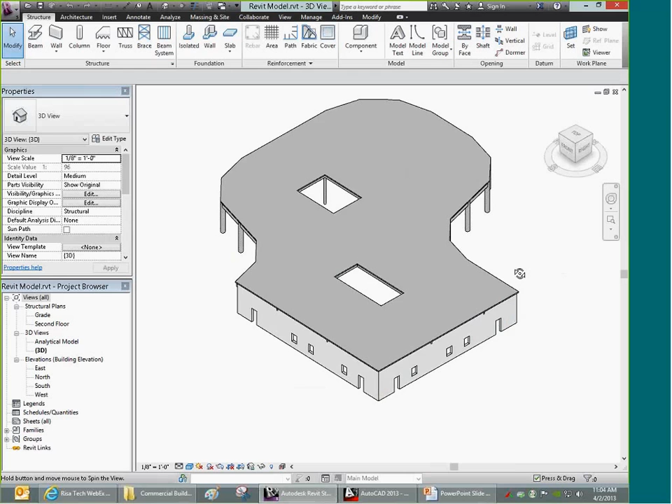So to start with, what we're going to actually take a look at here is an existing Revit model that I've created, and we're going to bring that Revit model over into RISA. Let's look first off at this Revit model, which is just a single floor of perhaps an odd-shaped commercial building, where we have some bearing walls, some columns, and this whole system here that you can see is made out of concrete.

So in this case, I've created a series of concrete columns, concrete walls, and beams. And if I click on one of these columns, we can actually go in here and take a look at its analytical properties. You can see that on the Revit end, I can set whether or not I have fixed or pinned end releases. I can also set whether this column is part of the lateral force resisting system or just holding gravity loads.

Similarly, on the walls here, I can come in and set what this wall is made out of. In this case, this is just a generic 12-inch wall, concrete beams. So I just have some generic sizes set for everything in the Revit model here, and we could presume that maybe you already had your Revit structure model built, or that you built one based off of an architect's model. But in this case, for the first floor of the building, we're going to take a look at how we would do commercial building design starting from Revit.

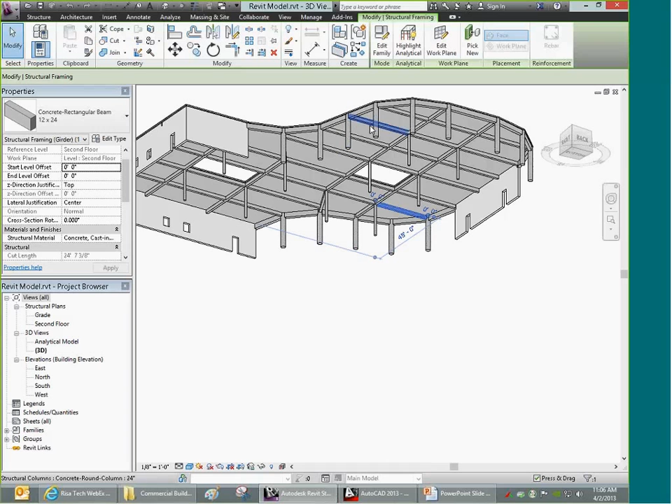So in my Revit model, once I have everything set, I want to make sure that I have the RISA Revit link installed.

Now, that's a free download from our website, so you can go on there and download it. And what that does is it adds this extra button into Revit, which is Export to RISA. It also adds an Import from RISA button.

So if I come on here and say Export to RISA, it's going to ask me whether we're going to export to RISA Floor or RISA 3D. Now, for building design, RISA Floor is definitely more powerful, so that's what we're going to want to go with here. I'm just going to leave all the rest of the settings basically the same, and export out to this folder. So I picked a path for that.

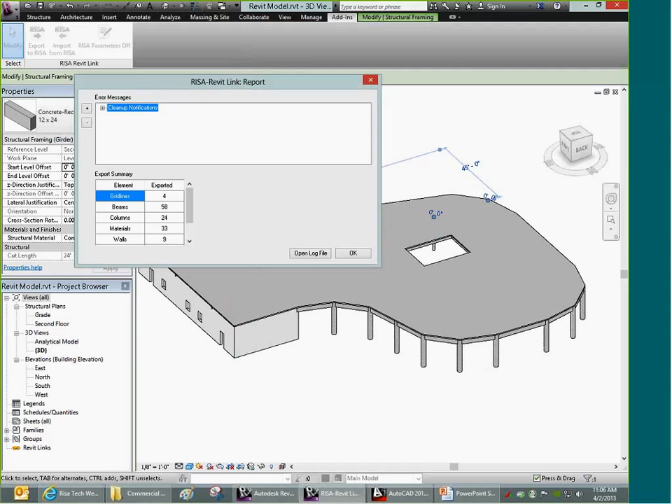And when I hit OK, Revit, using the RISA Revit link, is going to take all of this information and send it out to RISA. Now, before it sends it over, it's going to give me a little report, and it's going to say, hey, a little bit of model cleanup had to be done in order to get this model into RISA. That's pretty typical—sometimes some joints won't quite align, so it'll do that cleanup. Otherwise, we get a nice little summary here that shows everything that was sent over into RISA Floor.

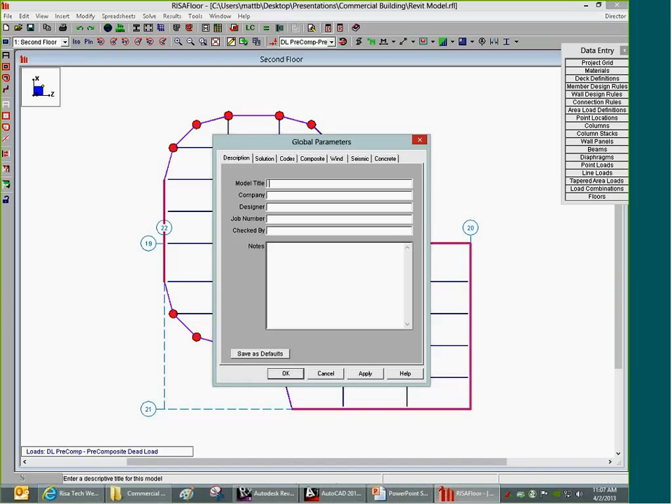So now RISA Floor launches, and we're in version 7 here. The first thing that pops up is the global parameters. I'm going to hit OK and exit out of there so we can take a closer look at this model that I've got going on here.

So let's come up and take a look at a full model view of what we have. You can see that it pretty much matches what came out of Revit. Now the slab that was on here, if I set that to be transparent, you can see that gets brought over as a slab edge—that's that blue line in the RISA model. And here all the walls and beams and columns and everything else has come over.

This is how we're going to handle just the first floor of this building, as though we brought it in from Revit. Certainly Revit has a lot of information, but it doesn't have all of the information necessary to analyze and design a building. So there's a few things that we need to go in and tweak.

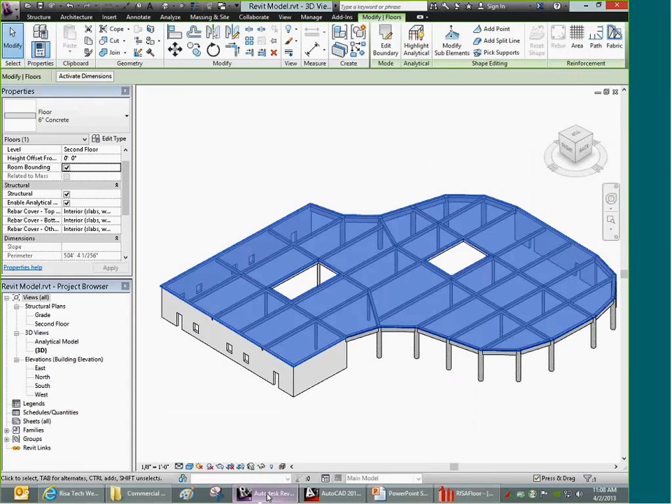For one thing, if I come in here and take a look, we can see that we have a deck that got brought over from Revit, and that would be this sort of concrete slab that runs around here. This was brought in with the definition of 6-inch concrete. So I can come in here and modify what exactly that 6-inch concrete deck means. I can come into my deck definition spreadsheet within RISA Floor and tell the program, yeah, 6 inches is good, but I'd like to use 4,000 normal weight concrete. This is some information that the Revit model may not have had stored in it.

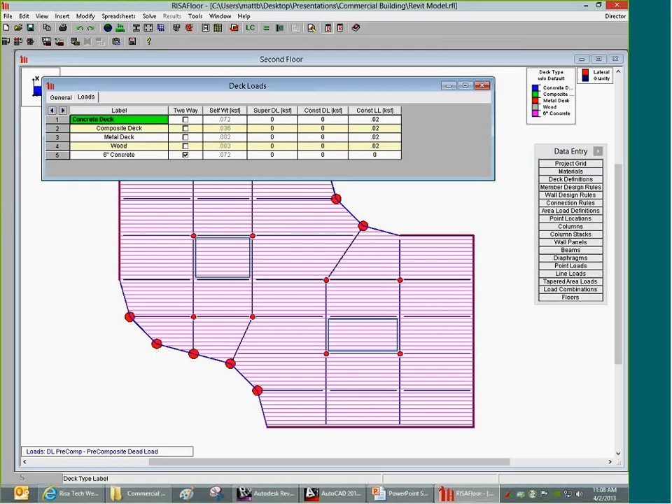Now, I'd also like to make sure under the Loads tab here that this is set up to do a two-way load attribution, and indeed it is—that's what was set up in the Revit model. So we're good to go on that one.

The same thing goes for the columns as well. There was a material set up in Revit called Revit Cast-in-Place Concrete, but that really doesn't have all the information that we need to get a column design. So I'm going to come in here and clarify to the program that I want all of those columns to be using 4,000 normal weight concrete as well.

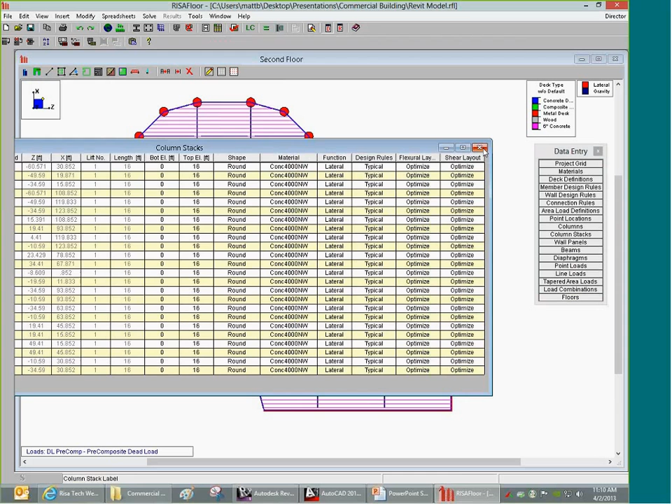So I'll apply that, and sure enough, now all the columns are set up to use that correct concrete. A lot of times when you go back and forth between RISA and Revit, it's important to come in and modify some of these materials to make sure all the properties are present, because Revit is set up primarily to do BIM and drawings, so it doesn't always have everything you need to get a full analysis done.

The same thing goes for the beams here. I'm also setting all those beams up to use the 4,000 normal weight concrete. So at this point I have this floor set up the way I need it, and there's really nothing else I need to do. You can see it's very quick and easy if you have a Revit model to get your building design set up and going.

But I understand not everybody out there is using Revit, so let's take a look at a similar example where we use AutoCAD instead. In this case, I have an AutoCAD drawing here.

In this AutoCAD drawing, I've modeled all of my beams as line elements. I've modeled all of my columns as blocks, where the center point is where the center of the column is. And my walls I've modeled as a polyline, with the thickness of that polyline set to be what the wall is. I've put the beams on a beam layer, the walls on a wall layer, and the columns on a columns layer.

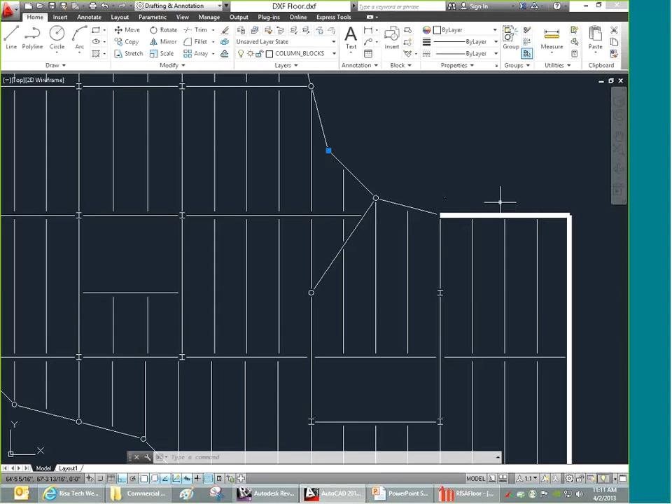Now, if you're going to start out in AutoCAD, you probably have a much more complex drawing that the architect gave you, so you may need to shut off some of the layers in there, or tweak certain things. If your wall is drawn as lines representing the inside and outside faces of the wall, you may need to go in and draw a polyline where the center line of that wall is, because that's the only way RISA is going to be able to read that in. But once you get everything set up, it's fairly easy to read into RISA.

Also note that in this case, I have all my beams set back about 12 inches from the center line of the beams that they intersect, or of the columns. That's going to be important to notify RISA when we import, that we have that setback. Otherwise, it will just terminate the beam right here, and that beam will be floating in space over near the girder.

So coming back into RISA Floor, I'm going to go up to the File menu, and you'll note that we have under Import this DXF file option. I've saved my AutoCAD drawing already as a DXF file. So now when I go to Import DXF file, I can point right to that file.

When I open it, it'll ask me a few questions. There's the scale factor and the units, which I can leave set as 1 in inches, since I set my drawing up to be in inches, the default for architectural drawings in AutoCAD. I'll tell it my floor elevation is at 30 feet. The beam standoff is the distance I have the beam ends standing off from members they intersect, and I've got that set to 12 inches. There's a tolerance, so you don't have to have everything exactly at 12 inches — that's just the maximum distance.

Now when I come in here for beams, it's going to ask me which layer of that AutoCAD DXF the beams are on — those are on the beam layer. I have my columns on the column layer, my walls on the wall layer. If I had grid lines for this project, I could also bring those in, but in this case I don't have any, so I'll tell it not to import anything for grid lines. This checkbox, 'ignore framing support for beam layer,' I get questions about occasionally — if this box is checked, the program will bring these beam ends in literally exactly where they are.

So all these beams would be floating, and you'd have this big disconnect, and the whole model would be unstable. But if I uncheck that, the program will come in and make sure each beam is supported at both ends by something, considering that end offset distance. That's the way we want to do it for an AutoCAD drawing that's drawn like this.

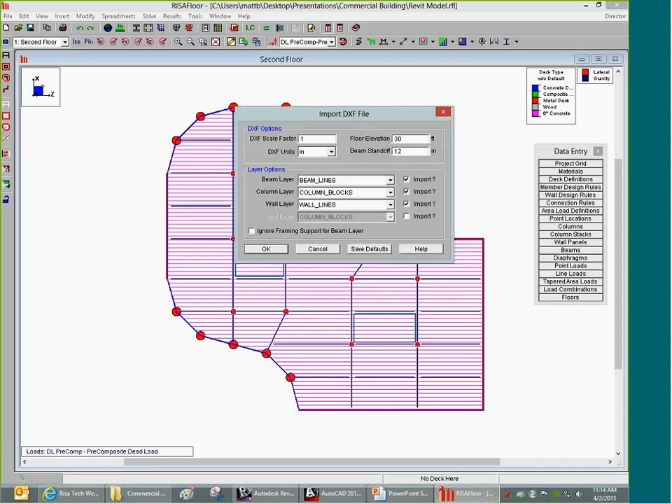If I had drawn all the beams so that they snapped all the way to the intersection points, then I would want to tell the program to ignore how those beams are supported and just use the literal lines that are in the drawing.

So with this all set up, I'll hit OK. And what happens now is we've created an additional floor in the model that is based off of that AutoCAD drawing. You'll note that these two lined up in this case.

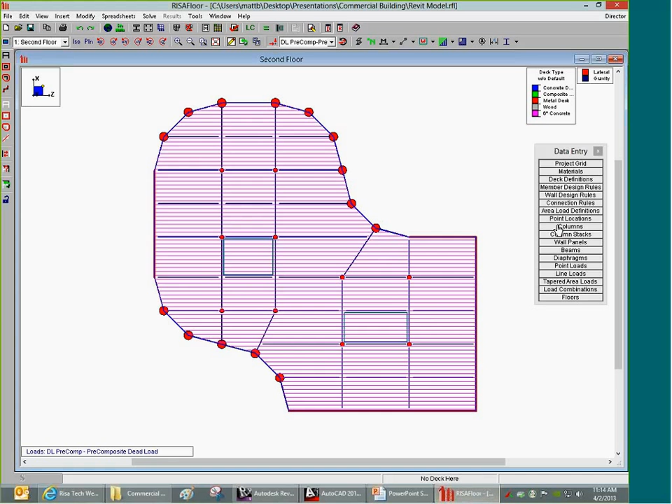That's because in order to set this presentation up, it's not realistic that you're going to be bringing in both AutoCAD and Revit. I made sure that the X, Y, and Z coordinates between the Revit model and the AutoCAD model I created were all aligned.

So at this point, when we bring it in from AutoCAD, there is certain information that can be gleaned from the AutoCAD model, but not nearly as much as we can get out of the Revit model. The AutoCAD model, for example, didn't really know what material any of these members were made of. It didn't know the thickness of the walls. It didn't know whether this is a gravity or a lateral member. It doesn't know a lot of that information.

So when we import from AutoCAD, there's a bit more work that we have to do to come in here and set everything up. But we'll go through that right now so you can get an idea of what's involved in modifying a model once you bring it in from AutoCAD.

The first thing I'm going to do is come in and give this a proper name. We're going to call this the third floor, under the floors spreadsheet in RISA Floor. I'll tell it to use the office area load. Now we're going to take this as a steel floor, and I'll put this in as a composite deck so that we can get a composite steel design for this.

We're going to come in and set up the splices. I'll say the splice on these columns will be 14 feet below the floor level, so the steel columns will be spliced right at the top of the concrete columns. I'll set up a shear splice, which implies that the base plate, where the steel column sits on top of the concrete columns below, is only set up to transfer shear and not moment. That'll be fine for this design.

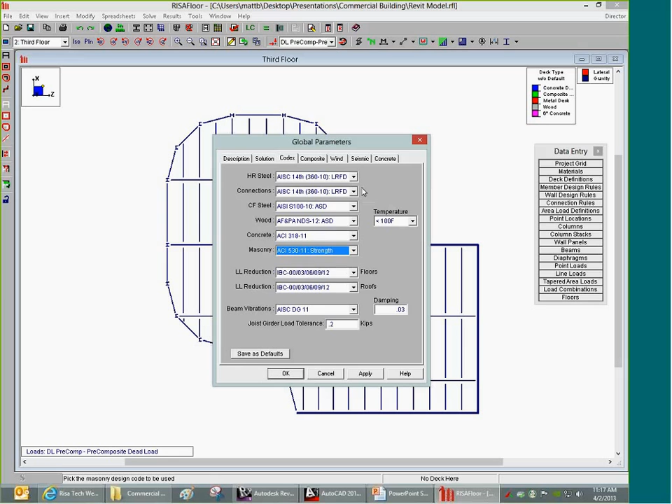I'm going to come in here. We can review a couple settings for composite. In this case, I'm going to adjust my beam deck parallel angle.

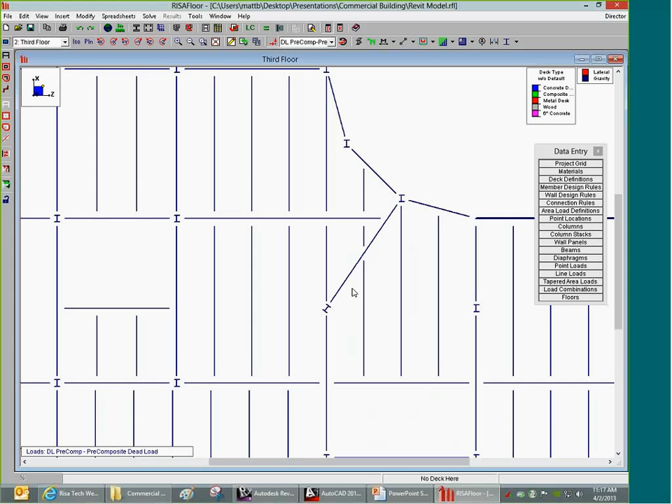This is one of the more advanced settings, but when we have members that aren't exactly orthogonal with each other, sometimes you need to tweak a few of these settings to get a full composite design out of it. In this case, I had to tweak that setting so it can design this skewed beam, because the ribs are going to be running east to west in this building on my rib metal deck, but the beam isn't really running perpendicular or parallel to that. So it's just a tolerance setting in this case.

Now let's go in and modify the walls in this one. Currently you can see that these wall panels were brought in as what's called a general wall, and with the general wall we can't get any sort of design, but I do want to get a design on these walls. So I'm going to tell the program to make all these masonry walls. We're going to tell these are lateral walls, which means they're going to act not only as bearing walls, but also as shear walls, and I'll set that up to apply to all of these walls.

So now at this point, we have masonry walls sitting on top of concrete walls. Is it realistic? Not necessarily, but the whole point behind this webinar is to show you all the different options for building design. So this may not be the most realistic building you'll see, but I want to make sure that we cover all the different bases behind the commercial building design within RISA.

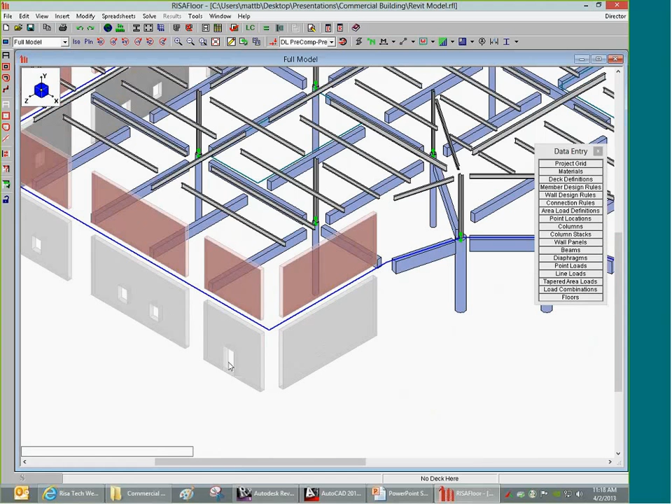So now, when we came over from Revit, if I take a look at the full model view, you can see that all the openings that existed in the Revit model came over into RISA. However, when bringing something in from AutoCAD, this is just a 2D AutoCAD drawing, and that's how we import from AutoCAD into RISA 3D, into RISA Floor, just 2D for the floor levels. So we don't have any information about what those wall openings may be.

What we can do, though, is enter that information directly within RISA Floor. All I need to do is double-click on a wall here, and this is going to pull up an elevation of this wall. I can come in down at the bottom and give it dimensions to give me snap points for windows. So now I can draw windows in using the Draw Openings tool. You can see that on a masonry wall, whenever I draw an opening, it automatically places a lintel above that opening. I'm going to go around the perimeter of this building and put in some snap points so I can draw in windows on all these walls.

Certainly we want to be realistic and capture these effects, because the windows in the walls are not only going to affect the way the reinforcement is laid out, but they're also going to affect the lateral stiffness of the wall. In this case, we're going to have a rigid diaphragm on this floor, being a concrete composite deck, so I want to make sure these walls all have the correct rigidity.

Why is that? If we take a look at the layout of the building I've got here, you can see it's sort of an unusual layout. So we're going to get some torsional effects, and by torsional I mean torsion, a twisting of the entire building, due to the fact that the center of rigidity of this building doesn't exist at the same location as the center of mass. So the loading for both wind and seismic is going to be offset.

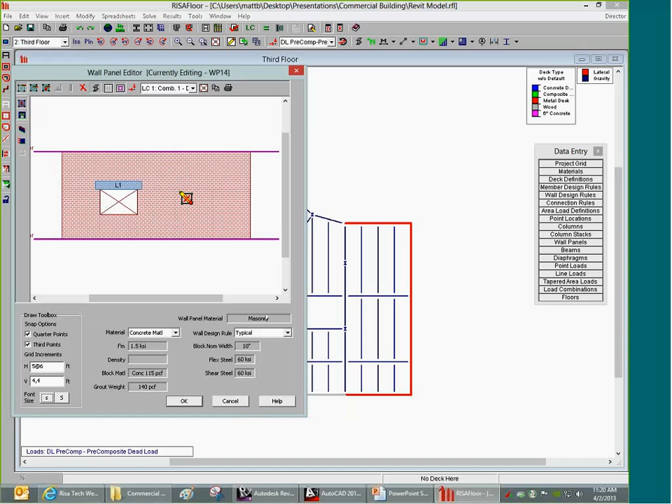The solver within RISA 3D is going to be able to pick up those effects, but in order to get the proper load distribution using finite element analysis, we need to make sure we've got the proper rigidity in here, hence the importance of putting in all of these windows and openings. Now at this point, I've put openings all around the perimeter of the building, and we can see that reflected there. That'll take care of that.

The next thing we want to take a look at on this floor are all of the columns. We can see that the program brought in all of the columns from AutoCAD as just plain gravity-only wide flange columns. I'm going to come in and tell the program that I actually want all of these columns to be acting as part of the lateral force resisting system.

And we'll see why once we get up to the roof of this building. For now, another thing I want to do is set this bay up right here as a moment frame. In order to do that and have it be effective, I need to have those columns rotated so that they're facing their strong axis to that beam.

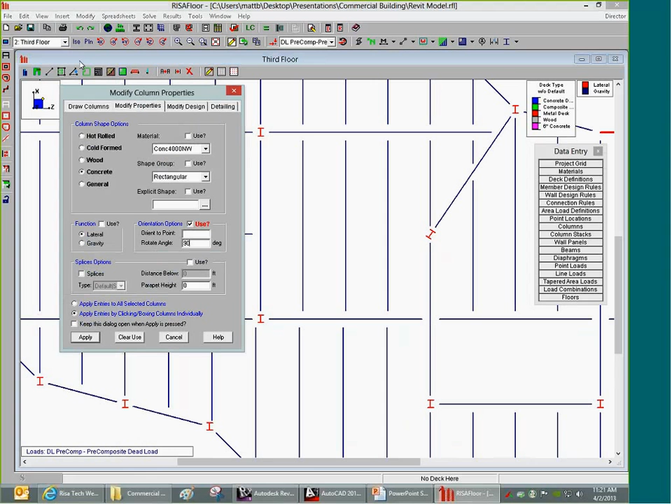So we can just come in here, using the modify columns, and rotate these columns by 90 degrees so that now they face each other.

At this point, it's important to set up the complete lateral force resisting system for this floor. I've mentioned already how we have the masonry shear walls over here, but let's say for the sake of complexity, so you can see all your options in the program, let's go with a dual system. We're going to have a dual system of both masonry shear walls and steel brace frames and steel moment frames. Once again, probably not a very realistic layout, but the idea is to get a look at how everything works in here.

So I'm going to start off by setting up these beams as lateral beams, and we're going to say that'll be a braced frame, that'll be a braced frame, this will be a moment frame, and this will be a moment frame.

So now these 4 frames are identified in such a way that when we go into RISA 3D later to get the lateral design of this building, these beams will be brought over, and the program understands that these are important for the stiffness of the building, for our stiffness solution.

I'll come back in here and tell the program that I want my 2 moment frame beams to have fixed ends as opposed to pinned ends, which is the default. I'm also going to tell it that those moment frame beams are non-composite, because of course if they're fixed end, they're going to have some negative bending along their length, so we won't be able to take advantage of that composite action.

With that being set, let's also take a look at the materials in this case. So when we brought everything over from RISA, or from AutoCAD, what we see is everything came over as just A36. Well, in this case, I want to use a stronger steel, so I can come in.

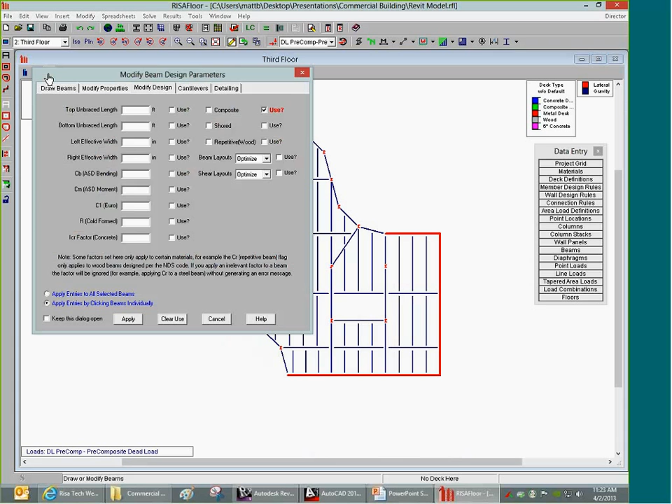So I just click OK on that, and I'll do the same thing for the beams as well. We can come in and set all these beams up to be using A992. Apply to all selected, and now all of the beams in this model are all A992 wide flanges.

And most of them are set up to be pin-pin strong axis orientation. So at least the program got that part out of the way for us.

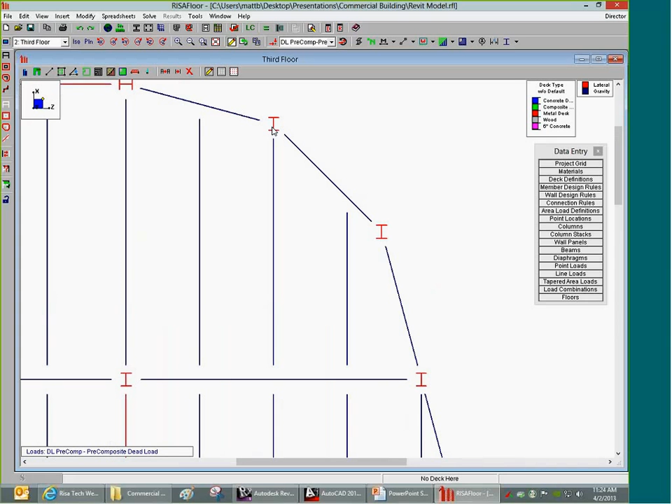Now, for the exterior of the building, what we're seeing is these wide flange columns came in by default, and I don't know about you, but I wouldn't want to have to bother doing a connection of this beam into this wide flange column with it oriented that way.

What I'm going to do is put a different column type in here to make it easier to get our connections. In this case, I'm going to come in and pick out an HSS pipe. So that's going to be an HSS round shape, and I'll put the correct A500 grade 42 on there.

And what that'll do is allow us to make easier connections on the outside of the structure. Now I'll be able to come in and weld a shear tab to all 3 sides of this column and connect shear connections to all those beams accordingly.

So some of these things that you may not have to deal with immediately, such as how you're going to do your connections, are things you might want to think about earlier on when you're laying out your project, so you don't have to go back later and change your columns to be something that the fabricator or the detailer might be more concerned about.

Now at this point, we have all these members set up. I'm going to come in and add a rigid diaphragm all the way around the perimeter of this structure.

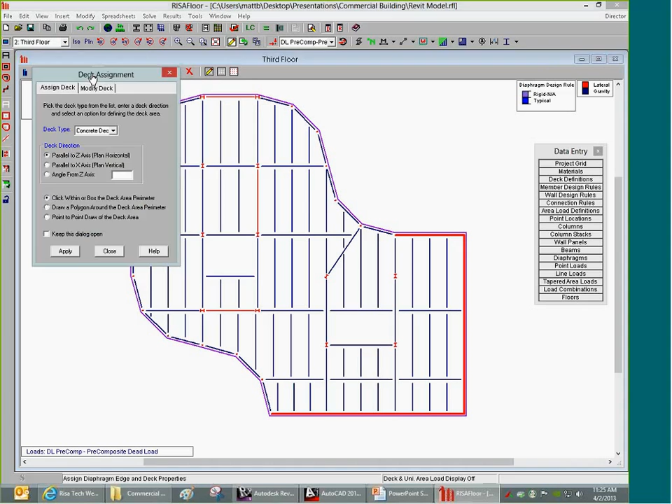And I'm going to punch a couple of holes in that diaphragm as well. You'll note that on the second floor, those were already punched through because these holes existed in the floor system within Revit. But in here, we don't really have a way to bring in diaphragms and openings from AutoCAD, so I just have to come and draw them in here.

And these openings are going to affect not only what the composite design of this beam is, since the effective flange width is cut out, but it's also going to affect our lateral distribution, because now the diaphragm has a hole in it, and so that affects where our center of mass is going to be. It can also affect centers of rigidity, depending on how I've got lateral systems arranged within the vicinity of that hole. All right, the opening is all set.

So now at this point, I've got 2 full floors done, one from Revit, one from AutoCAD. Now you'll note that the AutoCAD floor took longer to do than the Revit floor, certainly.

Let's take a look at that third option we discussed, which is creating a model from scratch. So I'll go up to Insert Floor within RISA Floor, and we're going to come in and call this one the roof in this case.

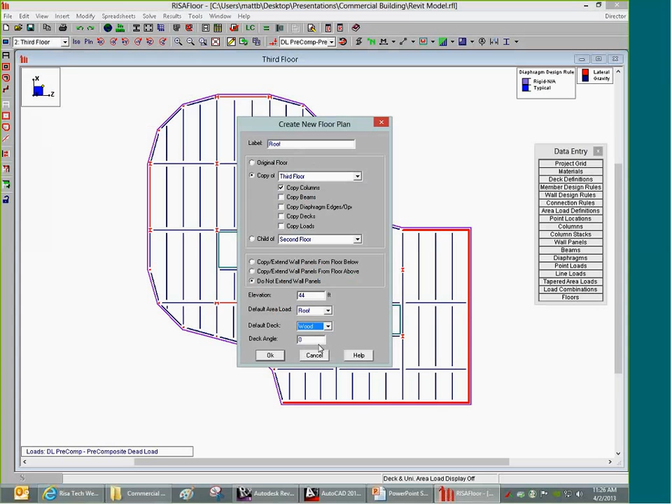And for the roof, we'll make it a copy of the third floor, but I want to do a different framing system up on the roof, so the only thing I'm going to copy up are just the columns in this case. I'll set the base elevation for the roof at 44 feet, and I'm going to give this a roof load with wood decking on there.

Now when I hit OK, all it's brought up for us on the roof are just the columns that we had from the floor below. One additional thing that we have available to us are the nodes from the floor below, which also got copied up. You may not be aware of it, but within RISA Floor, we do actually have nodes behind the scenes that are connecting everything.

This is one thing that makes RISA Floor a bit more powerful than some other similar commercial building design softwares, as you still have the ability to come into spreadsheets and move things around if you don't want to do it graphically. Certainly, graphical modeling is very fast to do in a lot of cases, but there are occasions where having the power of the spreadsheets in there can be something you really want to take advantage of.

Now, in this case, what I'm going to do is delete a couple of the columns that got brought up from the floor below. And when I do that, the program's going to ask me whether I should just be deleting the column at this floor or all the way down. In this case, I'm going to tell it only delete it at this floor.

I want to do this as a wood floor, and so I'm going to want to have some wood-bearing walls. So let's just come in to Draw New Walls. Under Draw New Walls, I can pick out my wall material. Let's say we'll do wood southern pine, and these would be lateral wood walls, so they'll be taking shear loads within my structure. And I can just draw this node to node if I like.

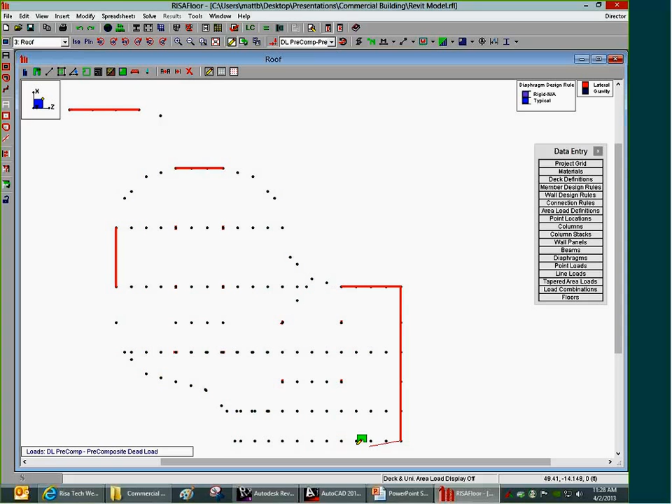So I'll come around and draw the walls in similar to how they were in the floors below. We'll drop those in, and these will also act as bearing walls for all the roof members that are going to be sitting on top of them.

Next, I'm going to put in some members. So I'll shut off the display of nodes so that I can just draw column to column. That'll be the easiest way to do that. I'm going to come in to Draw New Beams, and we're going to draw wood beams. Now, I could draw these as wood dimension lumber, but I'm going to have some rather long spans. So instead of going with dimension lumber, I'm actually going to go with the glulam in this case.

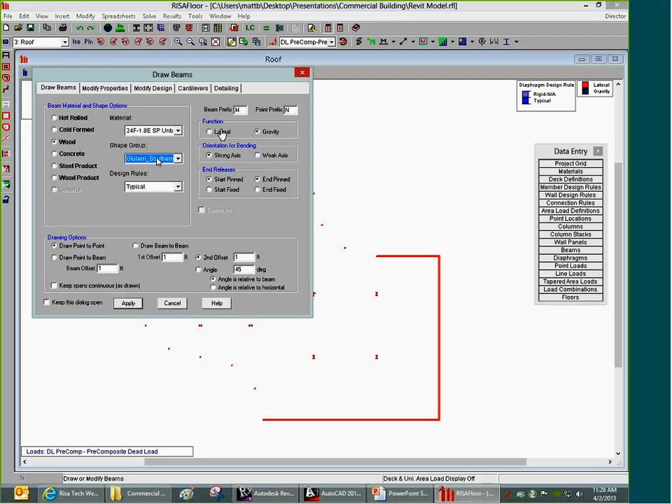And so I'll pick a 24F 1.8E Southern Pine glulam, and we'll say that these glulams are going to be part of the lateral system, and we'll see why before too long. I can just go around and draw point to point. Now you can probably see where an advantage comes in working in this 2D environment within RISA Floor.

If we're drawing within RISA 3D, one of the difficulties we may face is that RISA 3D has this wide open 3D modeling environment, which is great for modeling anything in the world. But one downside to that huge wide open 3D environment is sometimes it's tough to see the forest through the trees, in that you're looking at your entire structure at once when you really just want to focus on one floor level.

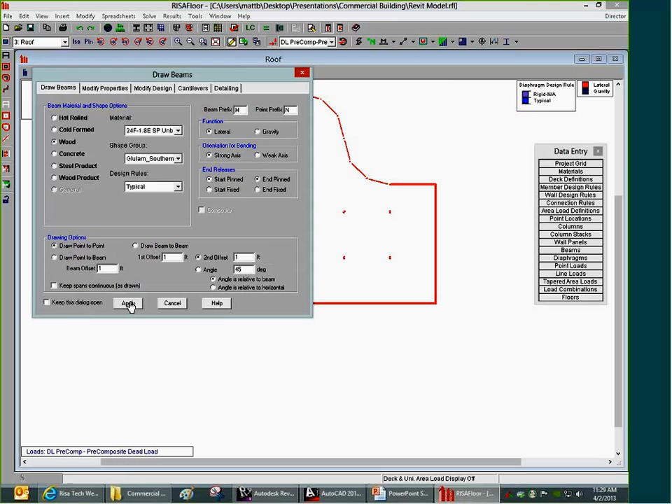Now, there are ways of getting around that in RISA 3D, but they can occasionally be a bit tedious to deal with. So instead, by working in RISA Floor, I can quickly move from floor to floor and ensure I'm only modeling on those. Let me draw in some ridge beams because we're going to do a slightly complex sloped roof for this structure.

And so I want to make sure that I have beams wherever the ridge exists. Now here I've run into a bit of an issue where I want to draw this beam along the ridge, but as you can see, I don't have any snap points set up exactly where it needs to go.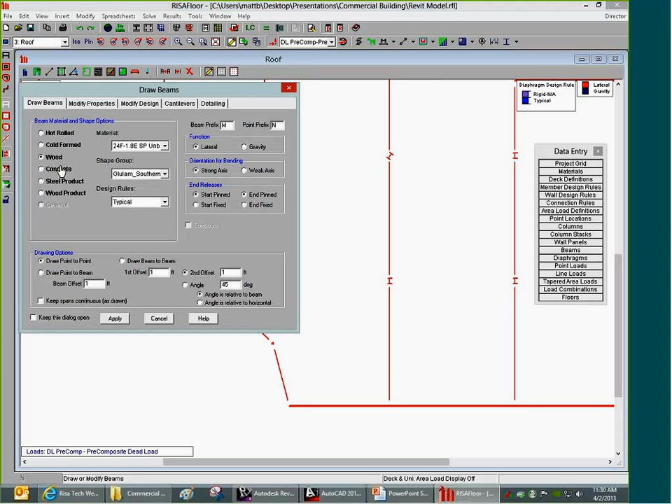Well, this is where I'm going to take advantage of some of the more unusual drawing features within RISA Floor. So if I come in and draw, you can see that under that Draw Beams dialog box, we had this set up to draw point to point. But there are other ways I can draw as well. So in this case, let me draw beam to beam.

So I'll tell the program I want to start with my first beam. I want this one to be offset 0 feet from the end of the first beam that I click on, and that I want the beam I draw to be at an angle of 0 degrees relative to the beam I'm drawing from. In other words, this beam is going to be parallel to the beam I started on.

So when I click Apply now, I just have to click on the end of the first beam and the beam that it's going to rest on. And that puts it in as parallel to that one, automatically creating a new node right there exactly where I needed it. So that's a rather handy tool to use.

Now at this point, I do want to add in some wall openings to match the floors below, because, like I said, we need to consider the stiffness. And even in wood walls, stiffness can play a major role in how much force each wall is going to take. So I'll come in and put some openings in.

And you'll see that, very similar to the way the masonry walls are done, the program puts in a wood header at the top of every opening that I put within a wood wall. So here you can see these headers are laid out.

I'm actually modeling more or less the entire building within RISA Floor. That's one of the things you do within this program, the building modeling, because it's much easier to do in this case. And we're going to be able to get our gravity design, and then we're going to go into RISA 3D later on.

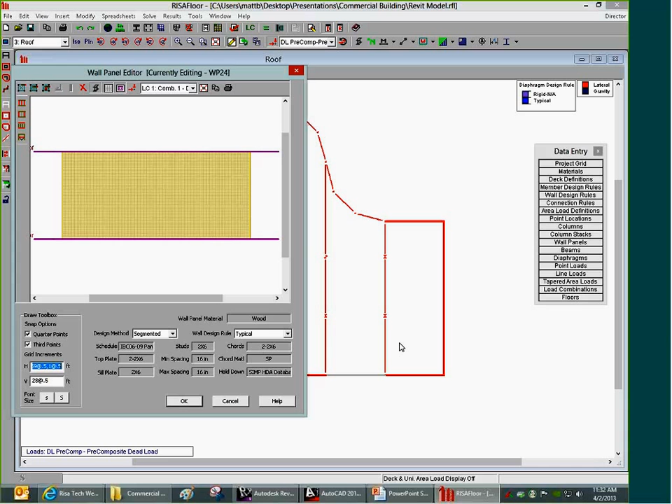So I'll continue going around and putting the openings in here. Now, had I had a floor that was identical or similar to the floor below with respect to the way the walls are done, I could have just copied these walls up, and then I wouldn't have had to draw these openings in.

But because I had masonry on the floor below and wood on the floor above, which, as I mentioned before, is probably not a very common design methodology, we have to do things in individual steps on each one of these walls. Now, if I double-click on one of these walls, you can also see that for wood, we get design method options.

These are the design methods prescribed in the NDS code. We can either do a segmented, perforated, or forced transfer around openings. Just for kicks, let's put this wall in as perforated, and I'm going to take this other wall over here and set that one to be forced transfer around openings. We can see how that affects each wall.

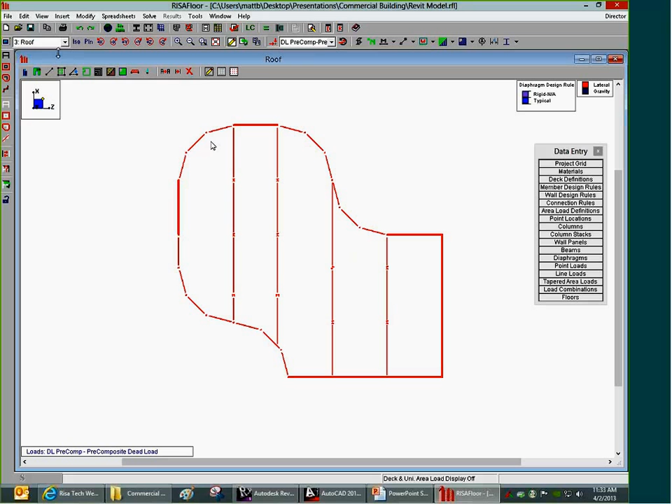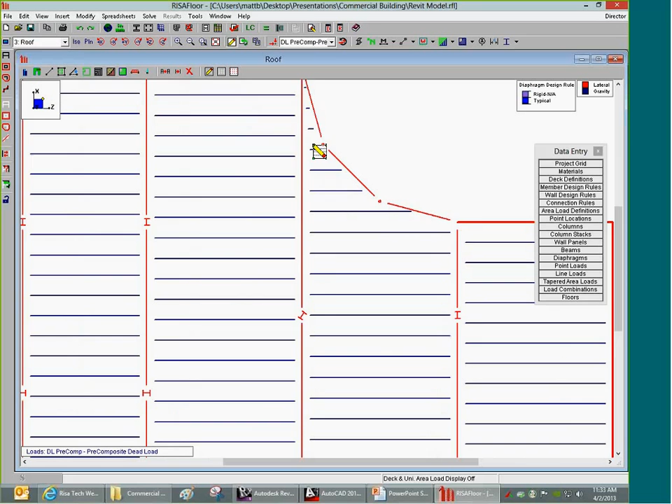Next, I'm going to come in and infill all of my rafter members or purlin members on here, so I'll generate infill beams. This is a really handy tool available only within RISA Floor, where I can set up some Southern Pine glulam members at an equal spacing not to exceed 4 feet. When I box this floor, it's automatically going to put those members in at no more than 4 feet on center within every bay.

Now at this point I have all of that laid out. What I also want to do is come in and modify some aspects of those roof beams. I'm going to set all of the roof beams in this case to be lateral. You may look at it and say that's not necessary since I've got these lateral walls handling all of the shear in the building due to wind and seismic loads.

However, remember that we also have wind load on the roof. We've got an uplift or downward load on those roof rafter members, and we want to make sure these are set up to handle those loads as the wind is blowing up and down on the roof, not just side-to-side. So I want to modify this so that all those members are now set up as lateral members. In addition, I'm going to be sloping these members.

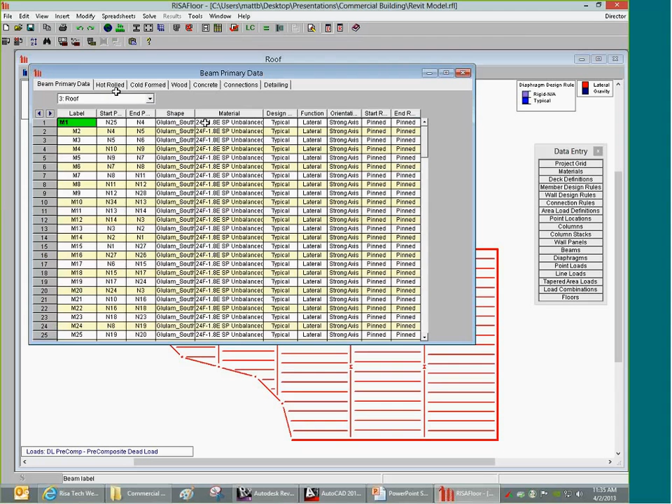If I slope them, that means there's going to be some axial load carried by each rafter. A typical wood beam isn't set up to handle very much axial load unless we have blocking. Now I do plan on putting blocking in, but it would be very tedious to model each individual piece of blocking on this wood roof. What I can do instead is come in and effectively tell the program that I have that blocking.

I'm going to do that through the Beams spreadsheet under the Wood tab, where I can set my LE2 value. Now you might be wondering what LE2 means - you might be wondering that about a lot of different things within the program.

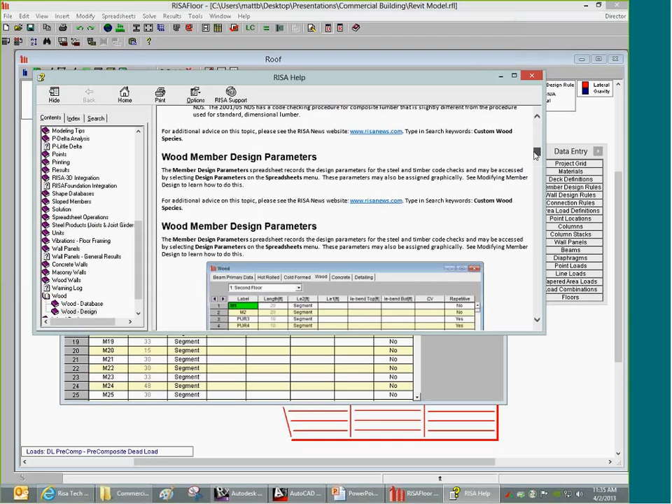One of the handy things in the program is that we have a help file set up to tell you about anything you're looking at. So if I'm wondering what LE2 is, all I need to do is hit the F1 key on my keyboard, which I'm doing right now, and that pulls up a help file all about the wood design parameters. If I scroll down a little, we get a handy informational picture showing what LE1 and LE2 are.

It's showing this wood member as sort of a column, but if we picture this as a rafter instead, the LE2 is the unbraced length in the weak axis direction - in other words, what's going to keep this purlin or rafter member from kicking out sideways, versus the LE1, which is its bracing in the strong axis direction. The blocking is going to affect the weak axis buckling of this member, so that's an LE2 value. If we assume we're going to have 4 foot on center blocking all over this roof...

Then what I can do is come up and highlight this entire column of LE2. I do that by clicking on the column header, and if I right-click within any spreadsheet in the program, I can choose Fill Block.

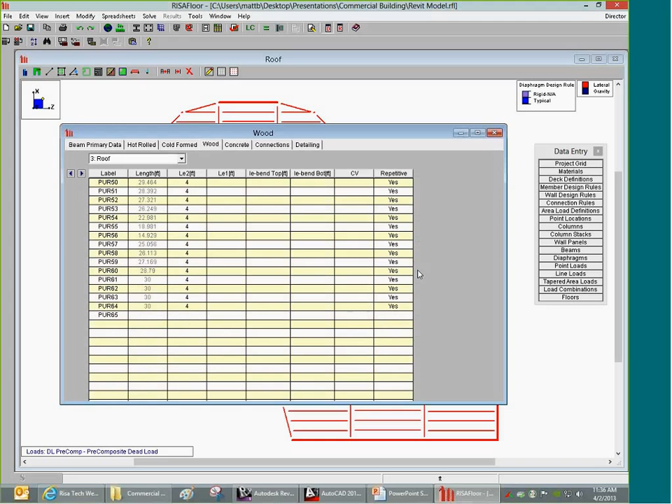What the program will then ask me is what value do you want filled in on all the blocks that are selected, and I'm going to say 4. So when I hit OK, it's now set the unbraced length for all those members to be 4 feet. It's a very quick and easy way of getting that set up within the program so that we get some reasonable designs out of these members.

Now, another thing to note - if I go back and turn on the node display for a second, you can see that there's a lot of nodes that got copied up from floors below that aren't necessarily relevant up at this floor level.

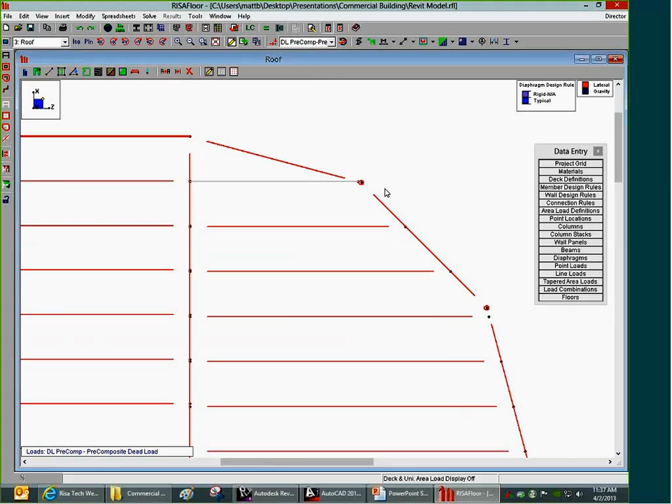What I can do with those nodes is clean them up by going to the Tools menu, where there's a cleanup tool called Delete All Unattached Points. When I click that, it goes through and cleans up any extra junk floating around in the model. A lot of times within RISA Floor, I like to do that to make sure everything looks good.

By doing that, I noticed I have an issue right over here where I have this beam that appears to be floating in the air. However, I can tell just from the pullback distance that it's actually connected to that member. But you certainly want to eyeball things in RISA Floor before you solve it.

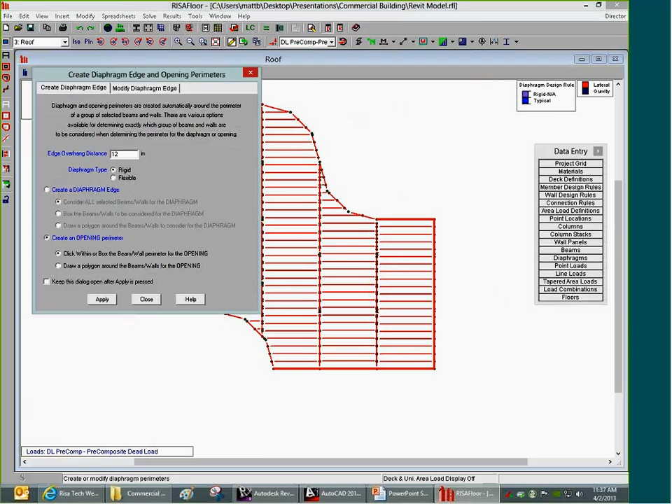So let's go in and put a diaphragm up on this floor as well. In this case, I'll start out with this being rigid, even though it's going to be a wood diaphragm, because what we can do later on is toggle between flexible and rigid, and see how that affects the analysis results within the building.

Now I've got my entire building laid out, but I do want to have a certain slope on this roof. You can see from the full model view that this is a flat roof, not very realistic for a building like this. So let's go in here and slope that roof.

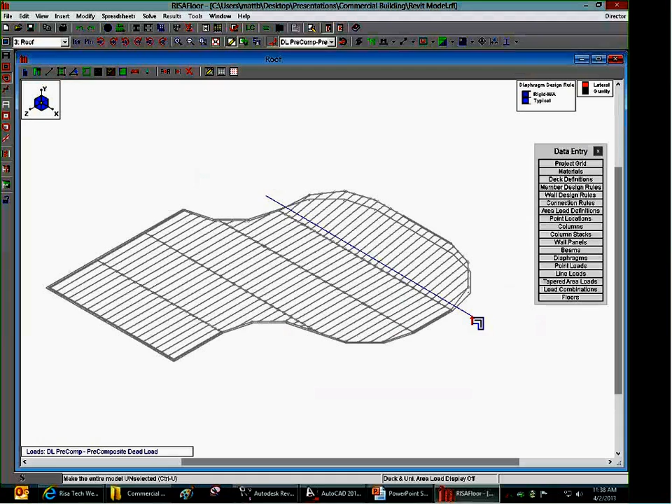I'm going to come in and select certain portions of the roof using the selection tools at the left side of the screen. If I select a portion of the roof, I can then use the roof sloping tool and tell the program I want this to slope up to a max height of 6 feet above the base height. Then if I click a couple of points, we can see it slopes up. Next I'll do that for the other portions of the roof as well.

In this case, we're going to slope that up from this ridge line right along here, grabbing each successive sloping portion of the model. Let's go over to a plan view to grab this next one here. You can see you can jump back and forth between any different selections.

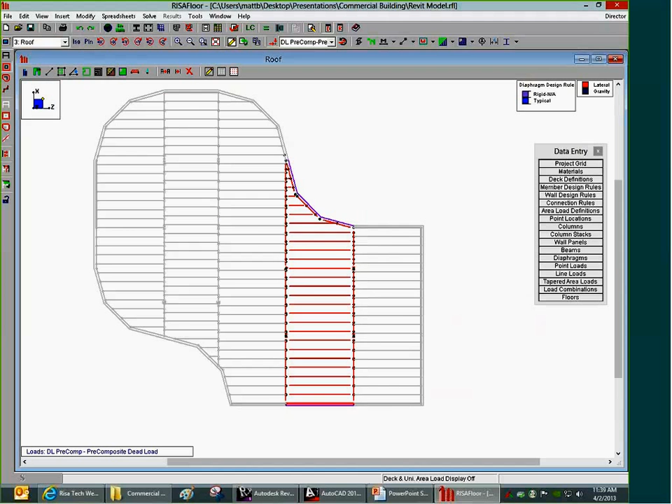So now if I come in here, I also want to have that portion of the roof slope upwards. And then lastly, I'm going to grab the bottom portion of the roof right over here, and we'll have that slope sort of upwards and outwards also at that 6 feet.

So what we get is a sort of zigzag roof slope on here, but the program is going to be able to do a full analysis based off of this, and it's not only going to affect the length of some of these members, but it's also going to affect the way that the wind loads are handled as well.

So let's come into the load combination spreadsheet, and I need to create some load combinations for this building. At this point, we've gotten everything modeled. So I'm going to come in and create strength level load combinations, for my concrete, masonry, and steel design.

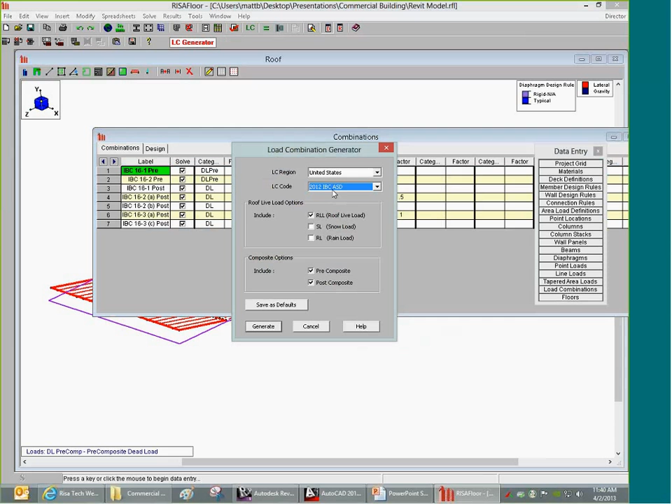And then I also need to come back to this load combination generator and tell it I want to do the 2012 IBC ASD combinations, and those are going to be for my wood members. So in this case, I have 2 sets of load combinations.

And if I come under the Design tab, this is the Design tab of the load combination spreadsheet, by the way, I can tell the program which load combinations apply to which materials. So we can see these ASD combinations down here. Well, those aren't going to apply to steel, so I can uncheck steel for those combinations.

Similarly, those aren't going to apply for our masonry design either. And so I can come in here and control for each one of these, what is this load combination used for or not used for?

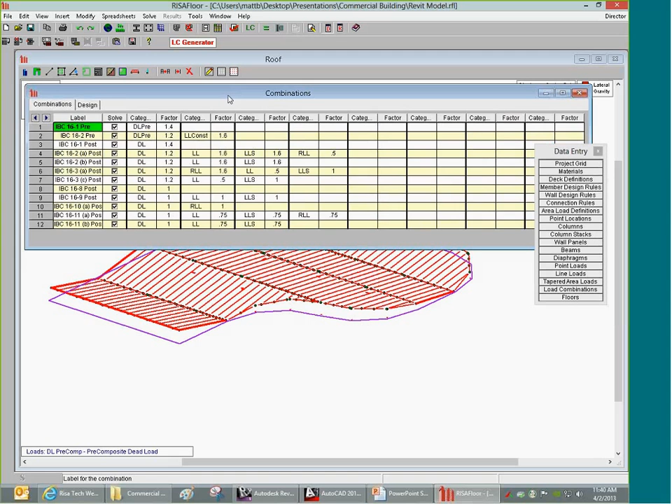And then once I've got that all set, I can go ahead and solve my model, so I'll just hit the Solve button up at the top. What's happening at this point is the program is doing a full finite element analysis of this model, and this is going to be an iterative analysis method.

If you look in the lower right corner of my screen, you'll see solution iteration, and it's going to count up through a number of iterations for each floor level. What's occurring is, since we didn't give the program any starting sizes, it's going to start off with relatively small members, solve and see what passes and fails, then upsize members as necessary in order to get them to pass. Once it finishes all of this, it'll come up with a list.

What we'll see in this case is I've got one roof span warning where my deck is spanning a little bit farther than maybe it should be, and that's all right in this case. We can also see that I had a few different members that failed, and we can go back and take a look at what some of those are.

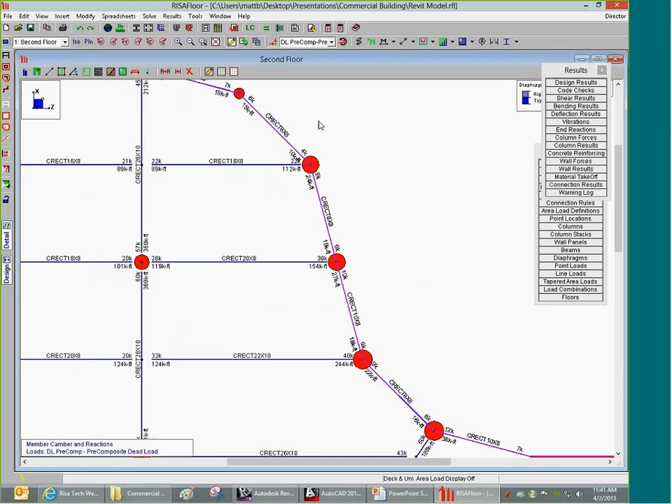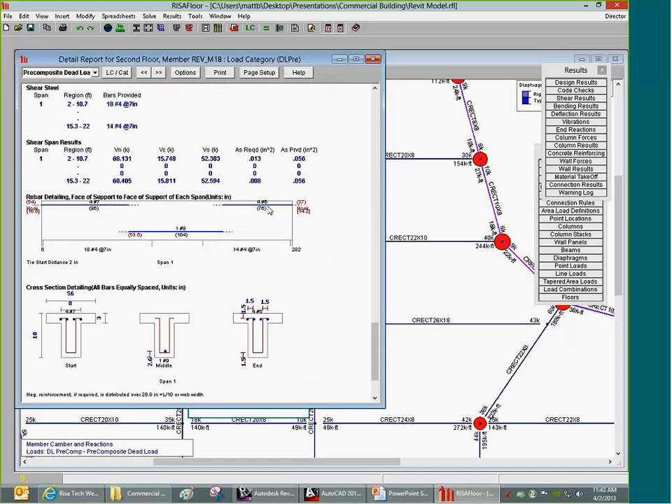Coming down a little farther, I can get now a layout on this beam where we can see it's suggesting one number 9 bar at the bottom, 4 number 7s at the top on the left, and 4 number 6s on the top at the right. So we could go in and modify or tweak anything we wanted to on this beam, but at least now we know sort of what that design is going to be.

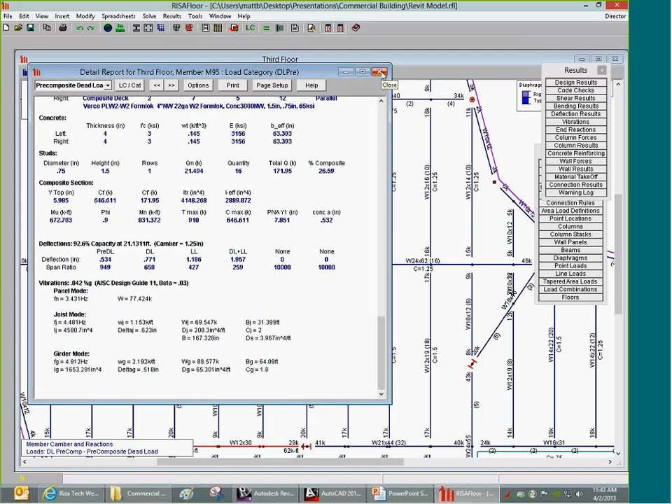Moving up to the third floor here, I can take a look for each steel beam. I can take a look on this W24 by 62, and we can see all the point loads from the end reactions of beams framing into it. I can get all my information on here, and scrolling down a little bit farther, we can see that for composite bending, we're at 88.9% of capacity. Non-composite was 87. Deflections was 92.6. So here's a beam that's actually being controlled by deflection, and even at that, the program's recommending a 1 1/4 inch camber along this beam.

Now I could come in and take a look at some alternate member sizes as well. Let's say one of our typical floor beams is a W12 by 16. If I click the design tool and click on that member, I can come in here and take a look and see why wouldn't it pick a W12 by 14. Well, if I choose W12 by 14 out of the list, it runs a code check on the fly for that member and tells us, nope, that member fails the bending check in that case. Or maybe we could take a look and see how would a W14 by 22 work in this circumstance. Or what if I wanted to reduce the studs or change the material? The design button over here allows us to do a lot of different what-if scenarios within the program, which is very handy.

Now at this point, I could print out my results from RISA Floor using my report printing tools or printing individual spreadsheets. And now I would probably want to move on and go into RISA 3D, and we do that with the Director tool in the upper right corner.

Coming in here, RISA 3D is going to do our lateral design, so it's going to ask us about the wind and seismic that we have. In this case, let's do a design using 115-mile-an-hour wind speed and an exposure category of C.

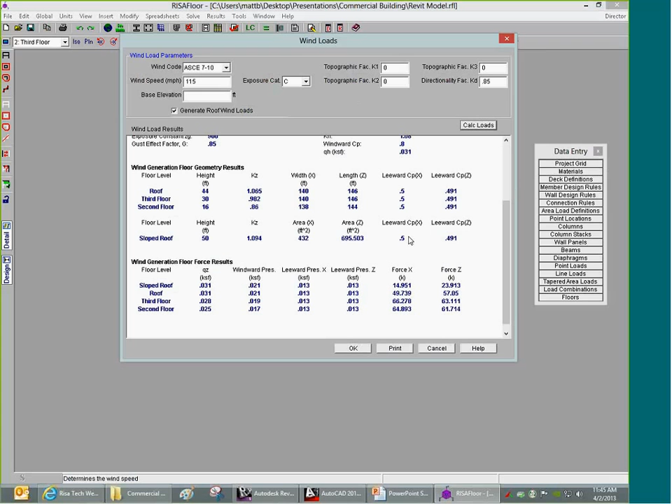Right in here, the program is using ASCE 7 as well as the shape of our building in order to calculate all of the wind pressures, the windward and the leeward, and it comes up with forces at each floor. Similarly, we can do an equivalent lateral force procedure for seismic.

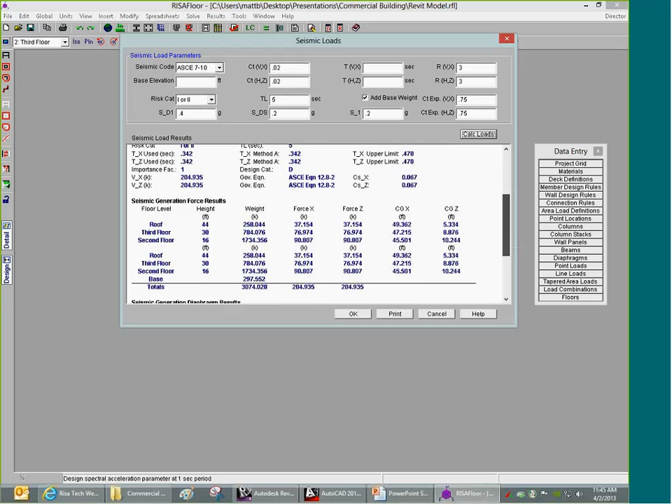So we can come in here, and if I enter in my SD1 and my SDS and such, it'll come in and come up with my seismic design. Let's put in some realistic values, by California standards, of 0.4 and 0.2 here. The program will tell us that we're in seismic design category D. Here's the equation where we came up with those seismic forces, and here's the force at each floor level. I'll hit OK at this point.

This is going to now bring us into RISA 3D. I'm going to come in and make a couple of quick tweaks here in RISA 3D just to make sure we get a rather quick solution in this case, so you don't have to sit there and watch this run for 15 minutes, since we've only got about 15 minutes left in the webinar anyhow.

With the model laid out here, what you're going to see is we've brought over all the lateral members from RISA Floor. You see a lot of those concrete floor beams that weren't part of our lateral force resisting system aren't shown down below. Now that doesn't mean those members don't exist.

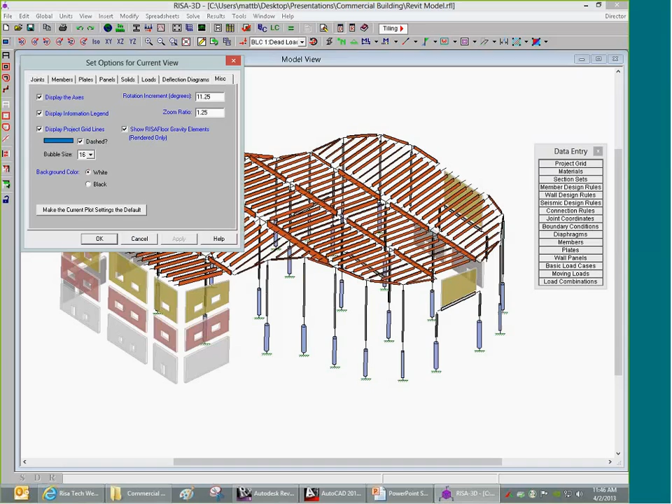Actually, if we go over into a rendered view, I can turn on the display of those members, and what you'll see is they're there. All of these gravity members are there and have been there all along. But we recognize that in RISA 3D, if you want to do lateral design, having all these extra gravity-only members hanging out in here is going to get in your way. So the program filters them out of the display by default so you don't have to have them in your way while working on all this.

Now let's come in, and on that steel floor, you can see I have this wood wall sitting on top of a steel beam, and if I render it, you can see that more clearly.

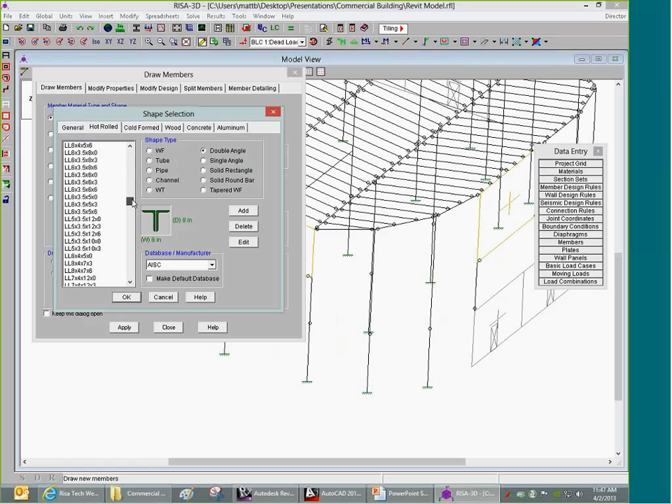I'm going to come in and put some braces on that steel floor because I want to add some lateral resistance out on this end of the building. So I'll draw new members, and we'll draw some double angle braces, maybe a 5 by 3.5 inch double angle arrangement. I'm going to tell the program this is a double angle with a 3/8 inch gap, so that's going to control the gusset size. A36, it's a V brace, so it's braced in the vertical plane, and it's pinned at both ends.

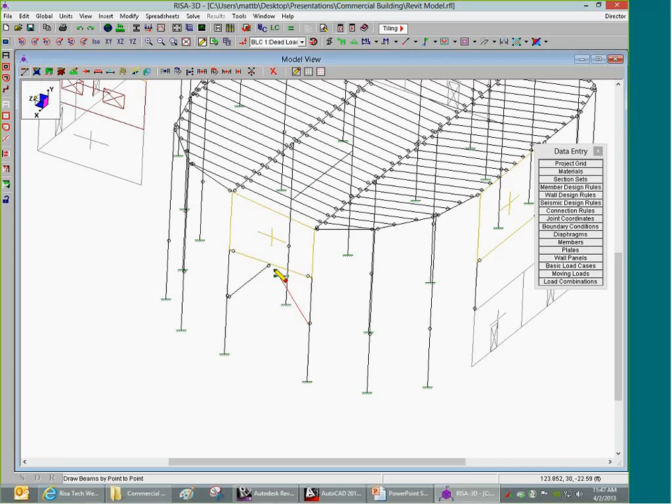I'm just going to draw these braces in here as chevron braces, right there, and right there as well. That will get us our brace layout.

Now, another thing I want to do is come in and tell the program that I want to get a chevron brace design for the connection at the end of that brace. So I'll tell the program to set up the connections to do chevron brace where these two braces intersect the beam, and that way we'll get a design on that one.

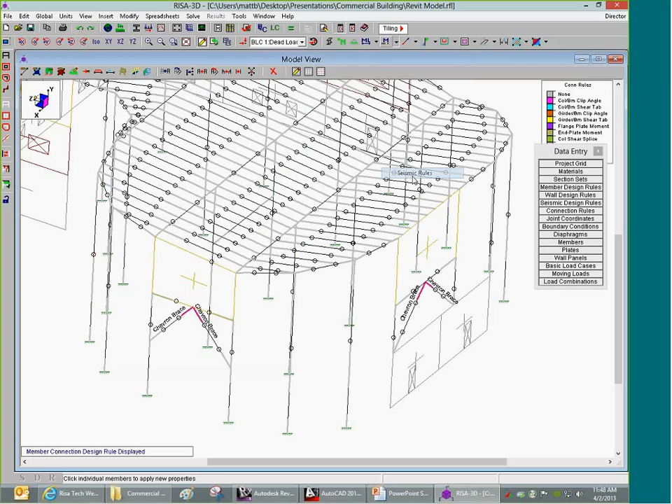Another thing I can do if I'm concerned about seismic is set up seismic rules as well. So I could tell the program, hey, these are part of a specially concentric braced frame. Then if I click on these members and take a look at the seismic rules, it now recognizes those as an SCBF member. I can come into my seismic design rules and learn what sort of extra seismic checks are going to be done on these braces as part of a SCBF, a special concentric brace frame.

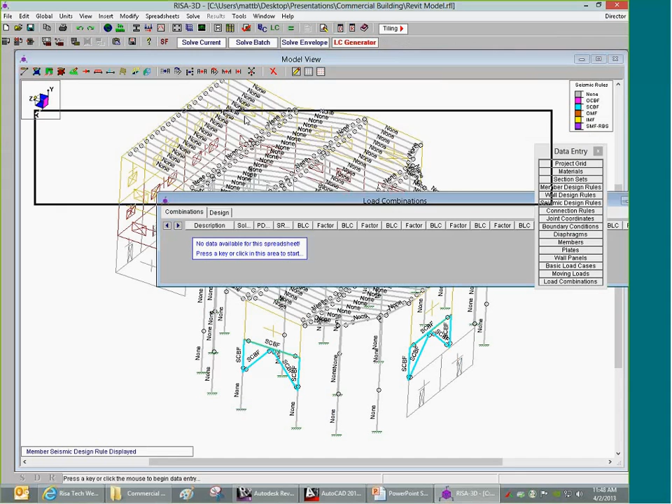Now, with this all set up in here, I'm going to come in and generate some load combinations. Remember that because we have both ASD and LRFD, we have to generate loads accordingly.

I'll start with my ASD loads and set up some wind loads on this model. I'm not going to bother doing the seismic loads since that would take extra time to solve, and we just want to get this out of the way. So I'll set up those wind loads for the X and Z directions, and we can see we've got about 27 load combinations that are going to be run on this structure.

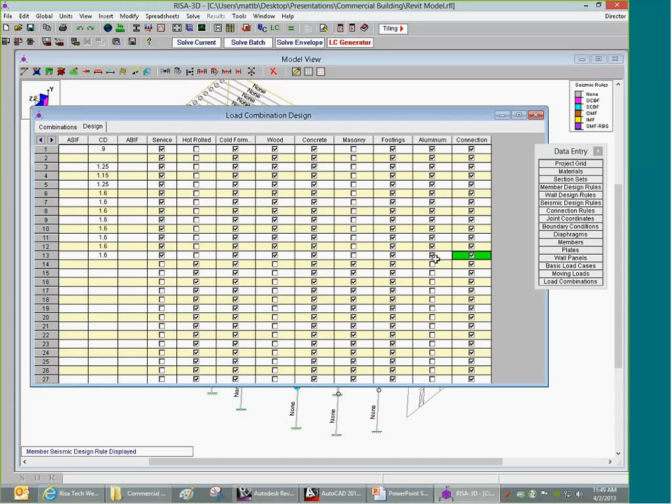I can also uncheck the hot rolled option by highlighting and using fill block, filling it with blank, so that my steel and my masonry aren't designed using those ASD combinations, and neither will my connections in this case. So I can control how my connections are going to be designed on this structure.

With that all set up, I'll go ahead and solve a batch solution. The program is now going to go through and, with a batch solution, solve each load combination that's in your model, producing results for each combination. This gives us the maximum amount of results, as opposed to an envelope combination, where we would only get the results for the worst case load combinations for any given member, rather than all of them.

But in this case, because I want to run this for connection design, I want to make sure I have the results for each and every load combination. As it goes through and solves, it's going to look at that rigid diaphragm distribution at each floor level, distribute the forces through each wall, figure out the wall force, and then give us a design.

So in the wood walls for this case, we're going to get a design of the sheathing and the nailing. For the concrete and masonry walls, we'll get a design of the rebar. For the steel members, we'll get code checks, as well as for the wood members. When it finally finishes, we'll have designs that meet all the lateral requirements of the code, ensuring that this building works for both wind and seismic.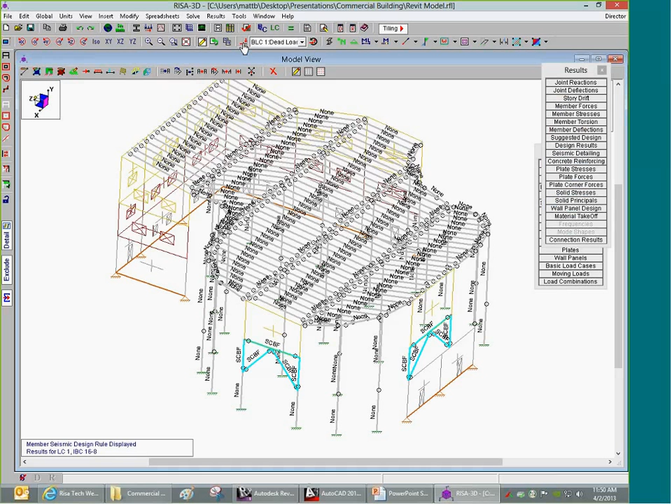After I finish up here, we can take a look at the loads that were placed on this structure. One thing I can view here is the dead loads, and I can also take a look at what the wind loads were up on the roof.

If we take a look at an elevation of the roof of this structure, we can see what those look like. Here we can see there's about a 10 psf uplift on this portion of the roof and a 5 psf uplift on that portion. If we switch so the wind's in the other direction, the magnitudes of these change.

As a result of all that, we can now come in and view how the structure deflects. Maybe I want to take a look at the deflection, and we can see we've got some pretty badly amplified deflection right over there. So some of these members we may have to go back and take a closer look at the deflection result.

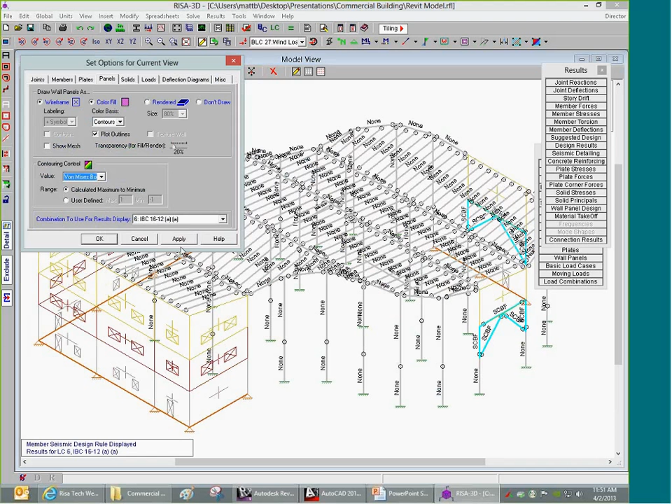If I take a look at the stress contours, for example, we can see how these walls are affected in terms of stress due to various load combinations. We can see that maybe load combination number 6, which we can take a look at to see what that one's all about, may be producing a bit higher stresses than some of the others. This is dead load plus wind plus live, and we can see some of those walls over there were experiencing a bit higher loads.

As per usual in RISA-3D, we can pull up detail reports for any members, go in and take a look at design results in spreadsheets, and print any of that out. Now I'm going to briefly use the Director tool to go over into RISA Connection so we can get the design of the connection for those braced frames.

What's going to happen in this case is we're coming over into RISA Connection and taking a look here, and you'll note that by taking a closer look at the connection design, we can find things that may not have jumped out at us in RISA-3D.

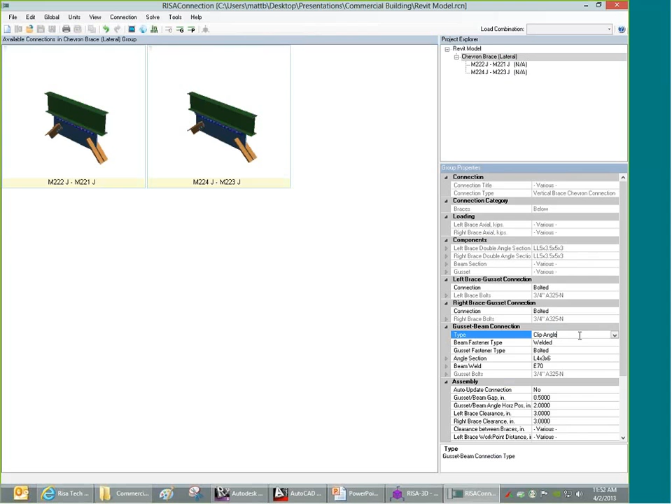For example, that beam we brought over from RISA-3D, a W16 by 26, I wouldn't have known just from RISA-3D that its flange is small enough that I can't really fit double clip angles on there. So maybe instead of using clip angles I need to switch over to a direct weld.

So the gusset plate is welded right to that beam. Now at this point I can come in and do a design based off of all the different end reactions from RISA-3D for both of these brace connections, and it'll come in here and give me a pass or a fail on them.

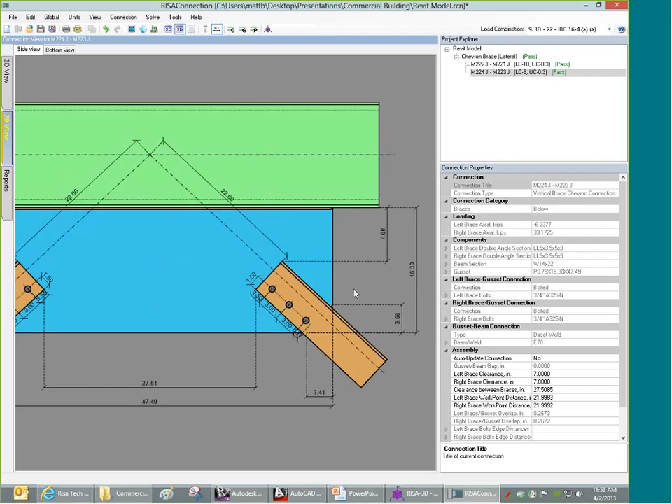I can see in the upper right corner it told me that this passes. I can come in and tweak anything I want in terms of dimensions to get this connection to work out. And based off of the report here, I can now come in and take a look and see, well, what's my Whitmore compression block for this connection?

I can click on any one of these and it'll expand out and show me all the calculations involved. So right here, bolt bearing, this is the equation that was used, and it was based off of AISC equation J3-6A. So I'll get all my connection information done.

At this point now, I could export that connection information out to a DXF, which we'll go back and take a look at in a second. I mentioned earlier in the webinar how we need a way to get our results out of the program, and that's going to be the perfect way to do that.

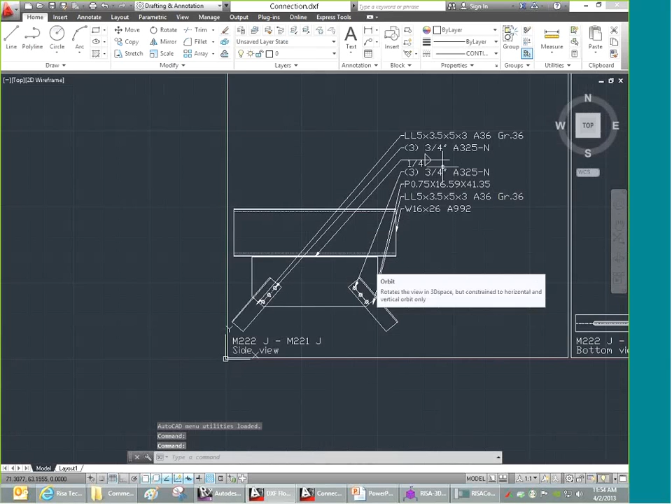So I can open this up now in AutoCAD, and here's my connections laid out with all that information. You have to remember that it's always important to be able to take the information that's out of RISA and get it into construction documents as well.

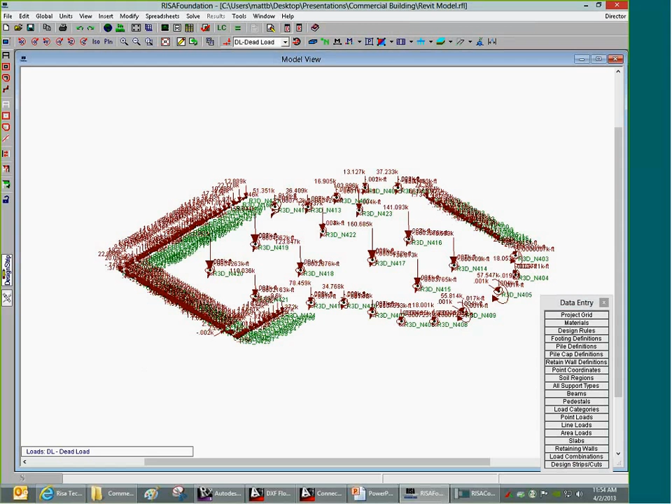Let's go back into RISA-3D at this point and now go into RISA Foundation. So I'm using the Director tool to take it over into Foundation. What we're going to do is have all of our end reactions from both RISA Floor and RISA-3D, or I should say the column and wall base reactions, all brought over here so we can actually lay out a foundation design.

To do that, I'm going to just snap it into a plan view here, and let's lay out a few different foundation types. Once again, maybe not a very realistic layout, but in this case we just want to emphasize some of your different options. So if I come in here, I can draw a slab, maybe, over in this portion of the building.

So that's going to be like a two-way mat slab. Then coming over on the right side of the building, I'll draw maybe an odd-shaped two-way mat slab as well. And I also want to tell the program that this mat slab doesn't exist right at the edge or the center line of the wall.

I want to bump that out some. So I'm going to tell the program to bump out all those slabs by 2.5 feet from where all the columns and the walls bear on them. That way we'll have a little bit of extra toe space out around there to spread out some of the loads that are going to end up on them.

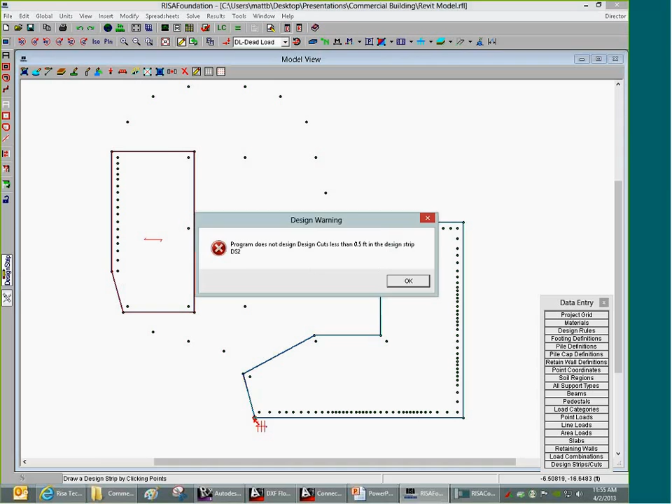I'll come in and put in some design strips, and this ensures that I'm going to get a rebar design for this slab. So I'll drop those in right along the perimeter of all the slabs there. This is going to give us the horizontal direction rebar, and then we also need rebar that's going to run in that vertical or north-south direction in this case. So I'll draw this in so that we get rebar design for both of those, coming around the perimeter there, and we get that all set.

Now next, I want to put in some footings, so I can come in here under footing definitions, and I can tell the program to drop in some square spread footings that are made out of the 4,000 psi normal weight concrete.

I can draw those footings in all around the perimeter of the structure, dropping them in at any of these locations. And then let's go ahead and throw in some pile caps as well, using some 4,000 normal weight concrete, so we can get pile caps in the middle of the structure and see how these work, dropping them into those locations.

With all that laid out, and with all the loads brought in from RISA-3D and RISA Floor, at this point it's just a matter of solving the solution. It's going to run an FEA solution on all of this, and we're going to get designs for the complete foundation.

This is fully linked into RISA-3D, so as we make modifications in RISA Floor and RISA-3D to the structure, those modifications carry through into RISA Foundation. So a footing that works right now based off the loads we've given it might not work if we increase the dead load somewhat on the structure.

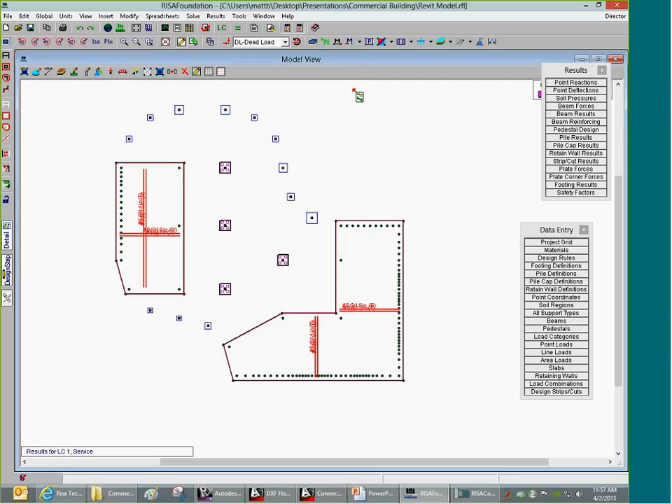Now I can come in here and take a look at how my pile cap design is. We've got a 4-pile layout, and here's all the various rebars that we need. Here's the code check, and we can see with this red number reported, we've got some failures, so we may need to take a closer look at this.

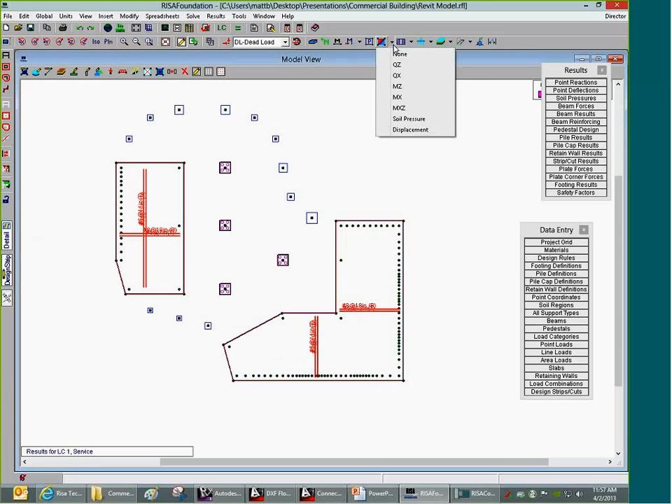I also want to check how my soil is doing, so I can view the soil pressure contours. For the mat slabs in here, right over at these corners, we seem to be having a pressure approaching 5 KSF, and I had set this model up by default with a 5,000 PSF allowable soil. So we're getting pretty near that edge range, although I won't be too concerned because there's usually a lot of safety factor in those allowable soil values that come from the geotech anyhow.

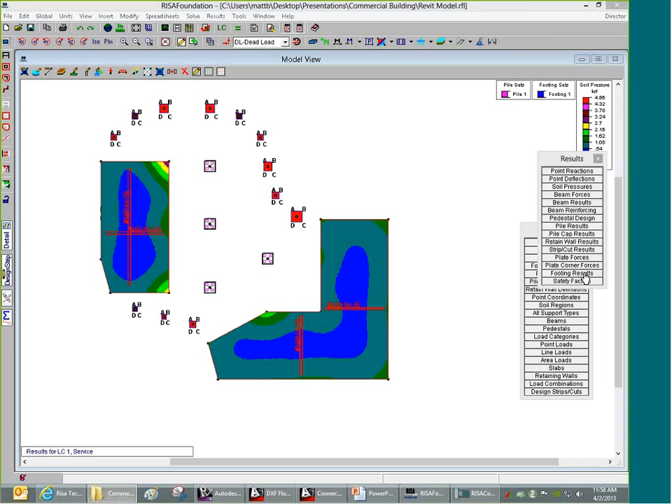With this design all set up, I could print out any calculations I needed from here. I can also export information on, say, the pile caps out to AutoCAD. This is one of the things I mentioned, bringing your results out. So let's export all the information on pile caps, and I'll open that up within AutoCAD. Here we can see for each pile cap I get a detailed output, which I can then throw onto my drawings.

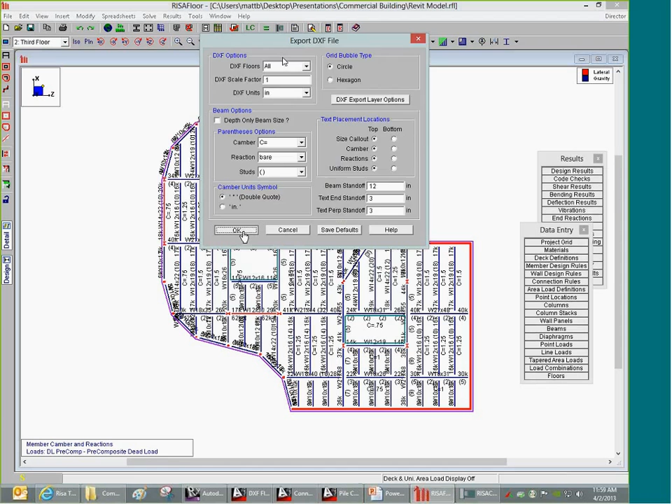Bouncing all the way back into RISA Floor, if my design is all done, I can also export my RISA Floor information out to a DXF file. Now I've brought my building design out into AutoCAD, and I can take a look at all this information—here's my camber, my end reactions, my studs, and everything else.

Another option from within RISA Floor would be to export this whole model back out into Revit. Through Revit, if I went back up to my add-ins and said import from RISA, I could bring all that information back into Revit, and it would bring all those additional floors and elements in there. I had planned on doing that for this webinar, but as I can see, we're just about to run out of time, so I'll skip that portion.

Now we've got a complete building design for multi-material out of RISA Floor and RISA Connection, and we've gone from basically scratch all the way to that design within a period of about an hour. Certainly that's not going to be the end of the story because there's a lot of additional tweaking that needs to happen here, and a lot of checking of results, and maybe we need to adjust some beam sizes and such. But as you can see, when you use these different programs together and understand how they interact with each other, you can really save yourself a lot of time going back and forth within your design.